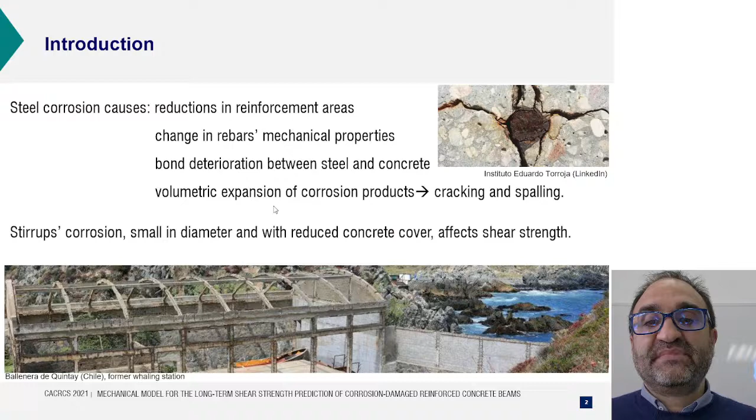Moreover, stirrups are generally smaller in diameter than longitudinal reinforcement, and they present a reduced concrete cover with respect to the longitudinal reinforcement, so the shear strength is fastly affected by corrosion. Moreover, shear failures are brittle, so it will be necessary to avoid shear failures during the entire lifespan of the structure.

So the idea of this work was to combine a shear strength model plus a material deterioration model, so to have a long-term evolution of the shear strength.

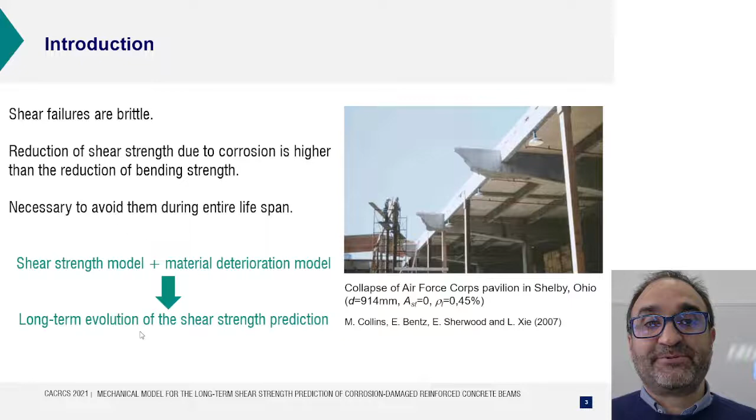Moreover, we have to take into account that steel corrosion will probably be influenced by climate change because the rising sea level supposes more exposed structures. The rising CO2 concentration will increase the risk of carbonation of concrete, and also the temperature increase influences in more dilatation and thermal contractions, so more damage to the structures, and also an acceleration of chemical processes.

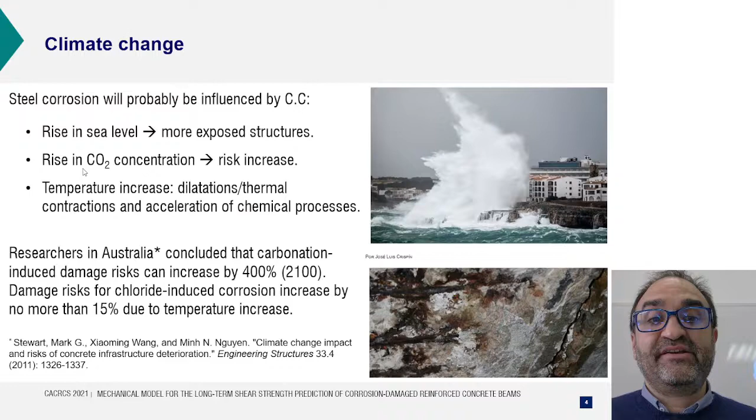Talking about shear strength, it's necessary to mention the existence of mechanical models and experimental models. The empirical models, in general, are only valid in a studied range. So it will be necessary to have broad databases to use empirical models in a generalized way. And very often, different sets of equations will be necessary for slightly different mechanical cases, because the equations will depend on the databases.

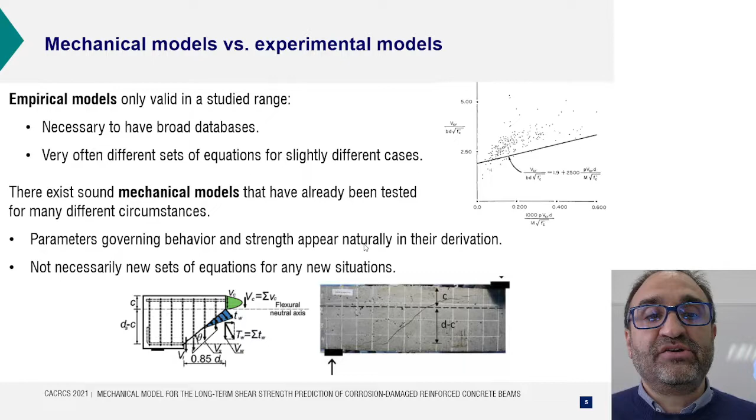But nowadays there exist sound mechanical models that have already been tested for many different circumstances. In this case, not necessarily new sets of equations are needed for every situation, and the parameters governing behavior and strength appear naturally in the derivation of the mechanical models, allowing their extension to different cases or scenarios.

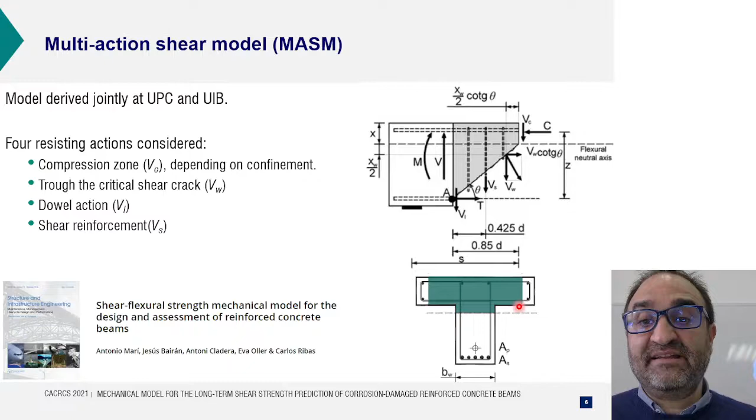Several years ago, at UPC and UIB, we developed the multi-action shear model, that is a mechanical model that considers the contribution of the stirrups, of the shear reinforcement, VS, you can see it here, but also the concrete contribution through different concrete actions: the shear transfer through the compression zone, here, the shear stresses transferred through the critical shear crack, this component here, and of course the dowel action of the longitudinal reinforcement. This model was developed for rectangular beams, but was very soon extended to beams with T cross section.

The MASM model was simplified into the Compression Chord Capacity Model that considers that the main contribution of the concrete is through the uncracked concrete in bending, and the other shear transfer actions are implicitly, not explicitly, considered.

This model has been validated up to date with around 3,500 empirical tests for reinforced concrete and prestressed concrete beams with and without shear reinforcement, with rectangular or T cross section, for slender and not slender beams, in case of fatigue, steel fiber reinforced concrete, beams with internal FRP bars, with external shape memory alloys, in many different situations. So we thought that it was necessary to extend the model for the case of corrosion.

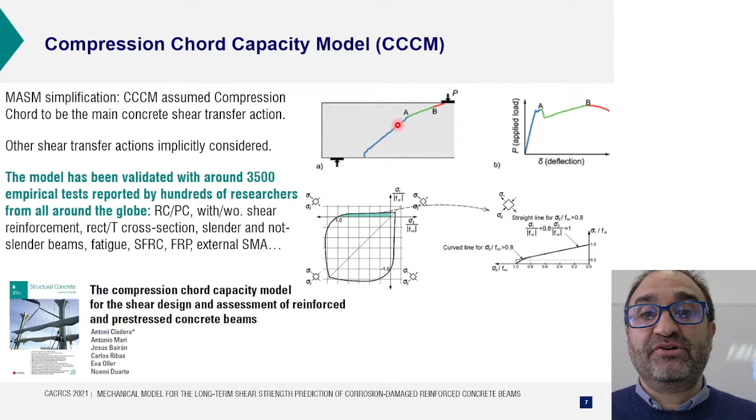As commented, we consider that the main shear transfer action is the shear transfer through the compressed zone, and this is an approach that many researchers have adopted during the last decade.

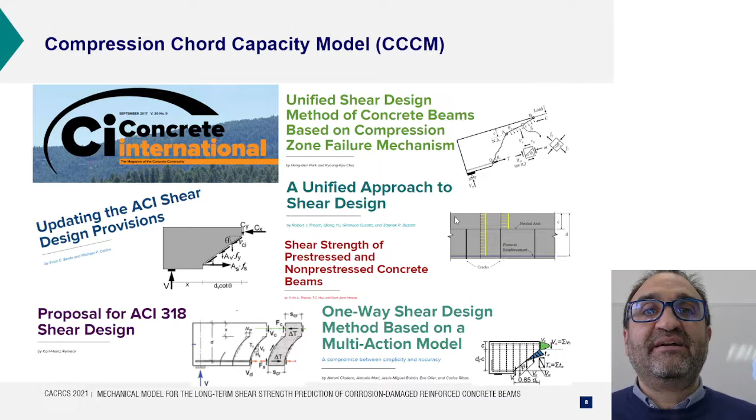In fact, 5 years ago, there was an international call of models to help in the update of the ACI 318 code, and 6 different models were presented to this procedure, and they were summarized in a special issue of Concrete International. And you can see on the left, 2 models consider shear friction as the main transfer action, but the other 4 models, from South Korea, 2 from the United States, and our model from Spain, consider the compression zone as the main resisting action. All these models were at the end more or less considered in the ACI 318-19 shear update.

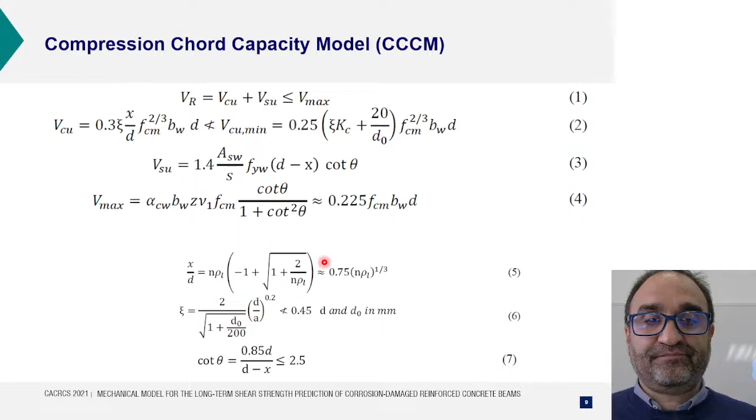I'm not going to fully enter into the compression chord capacity model, but at the end you have a concrete contribution plus a steel contribution. The steel contribution is from a classic truss model, and the concrete contribution considers a size effect. Here, this term comes from fracture mechanics and was developed by Professor Bažant, and the relative neutral axis depth, that is, let's say, the key of the model.

Just this year, we presented the extension of this model for corrosion-damaged reinforced concrete beams. It's openly published here in this journal, and we try to keep it as simple as possible. So we only consider 3 influences of the corrosion. For the shear reinforcement, we only consider the remaining area of the stirrups after the corrosion.

The same for the longitudinal reinforcement. For the longitudinal reinforcement, considering the remaining area after loss due to corrosion will influence the neutral axis depth. That of the stirrups will influence, of course, the stirrups contribution, and also the corrosion product expansion may produce cracks, as I previously commented, and cause concrete spalling.

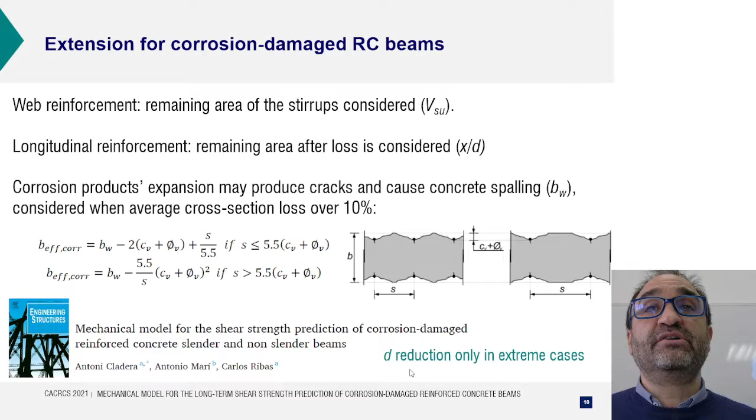In this scenario, we will have to reduce the concrete width of the web, and we consider this when the average cross-section loss of the stirrups is over 10%, and we use this model previously published. Just in some scenarios with huge deterioration, it's necessary to consider the reduction of the compression zone due to the spalling in the compression zone.

Well, we use a database with 146 tests, and you can see here with these black rhombuses that if we do not adapt the model to consider the corrosion, we will get unsafe results, especially for heavily corroded beams. But the red triangles here show you the correlation of the empirical shear strength and the predicted strength considering the corrosion. In fact, for these beams, the mean value was 1.19 with a coefficient of variation lower than 20%.

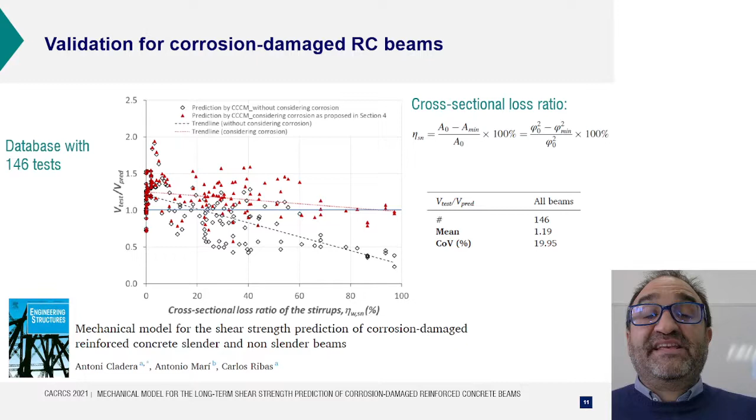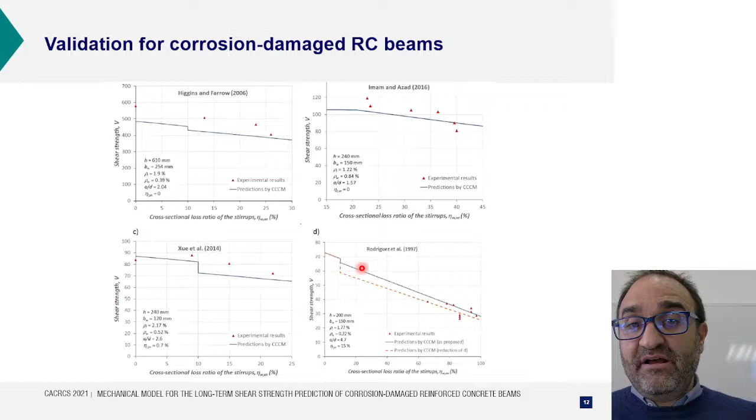These values are completely similar to those reported for our model with many other databases. So we think that this is a simplification, but a simplification that works reasonably well for the shear topic, because we have some dispersion in the results in the shear problem that we can never avoid. Well, the model was also studied for different experimental campaigns and correlates especially well.

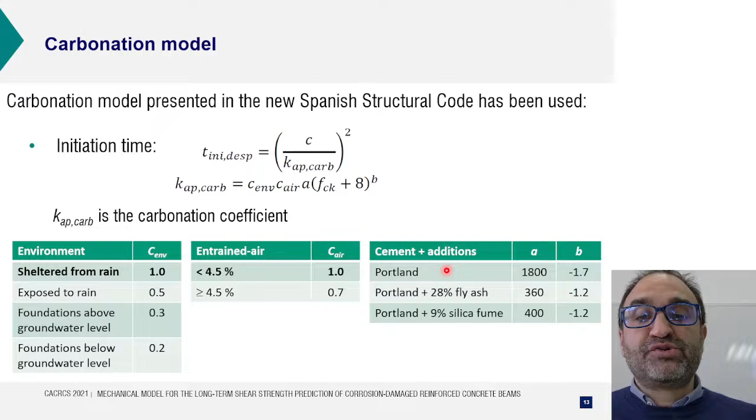And then we are going to combine this model with a carbonation model. In this case, we are going to use the carbonation model included in the new Spanish structural code that was published just a few months ago. In this code, we have a model with an initiation time that follows Fick's law, and a carbonation coefficient that takes into account the environment, for example, concrete sheltered from the rain, entrained air in the concrete, and the use of Portland cement or additions, fly ash, or silica fume.

And then the model also presents the loss of diameter of the rebars due to corrosion with corrosion rates that depend on the exposure class, as you can see here, with exposure classes from Eurocode, in this case for carbonation, and here for chlorides. I'm not going to comment here on the case of chlorides. We are working on that nowadays, but you can see that, of course, the corrosion rate is much higher.

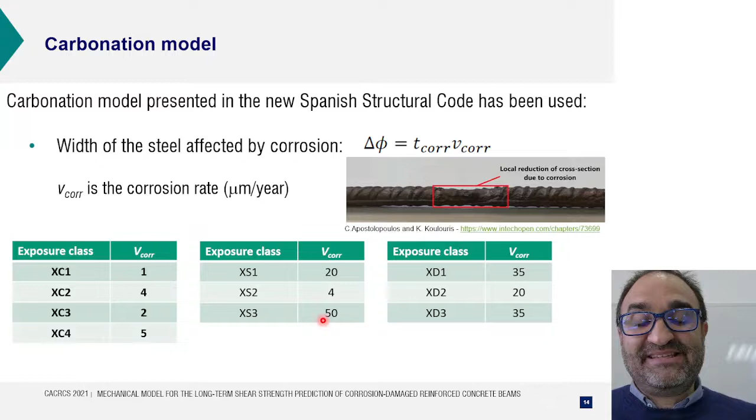And here, for instance, you can have a beam where you assumed an exposure class, but it was wrong. Then, for an already built beam, we can consider different corrosion rates, here 2 micrometers per year or 4 micrometers per year. In this case, at 60 years, the model is predicting the cover spalling. After this, you can see this dashed line; of course, the degradation will be higher because the corrosion rate will increase. We are not considering this scenario yet. We get until here.

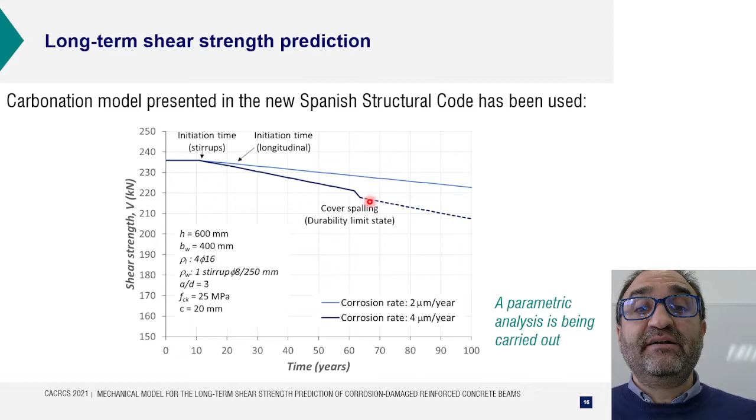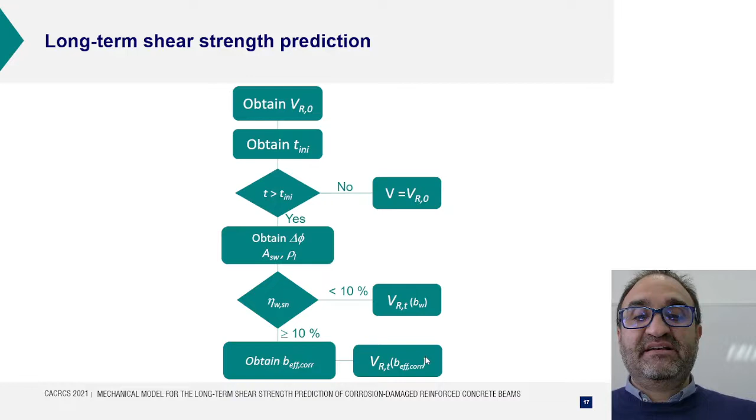So just to conclude, the joint application of the Compression Chord Capacity Model and the carbonation model has been presented here in this conference for the first time, allowing the prediction of the long-term evolution of the shear strength. More research will be carried out, including parametric studies and the combination of the Compression Chord Capacity Model with a chloride-induced deterioration model. This methodology, we think, could help taking decisions both in design and in structural assessment.